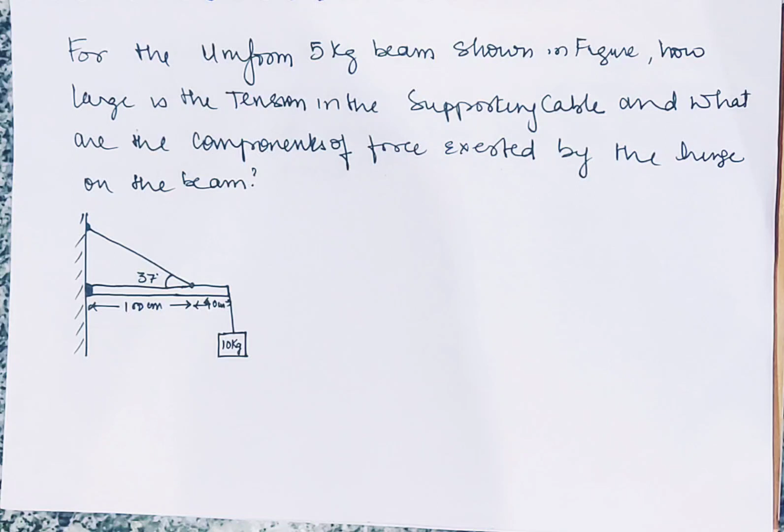For the uniform 5 kg beam shown in figure, how large is the tension in the supporting cable and what are the components of force exerted by the hinge on the beam?

Beam weight is mass is 5 kg. Okay, now let's make the free body diagram of this beam.

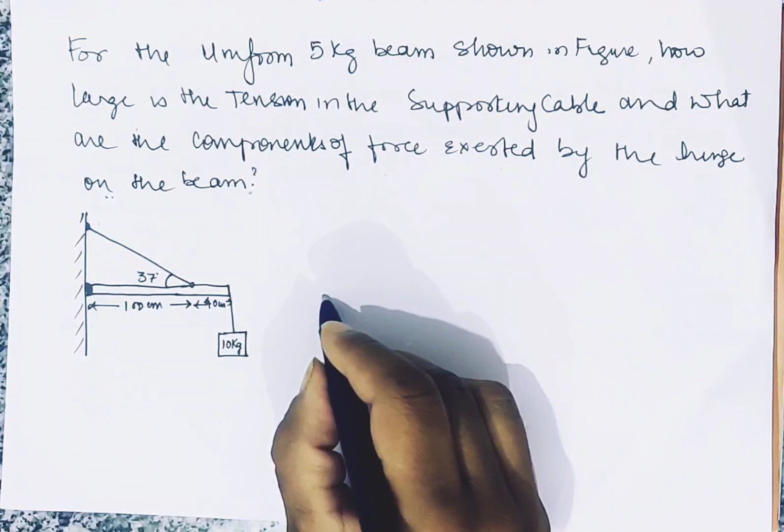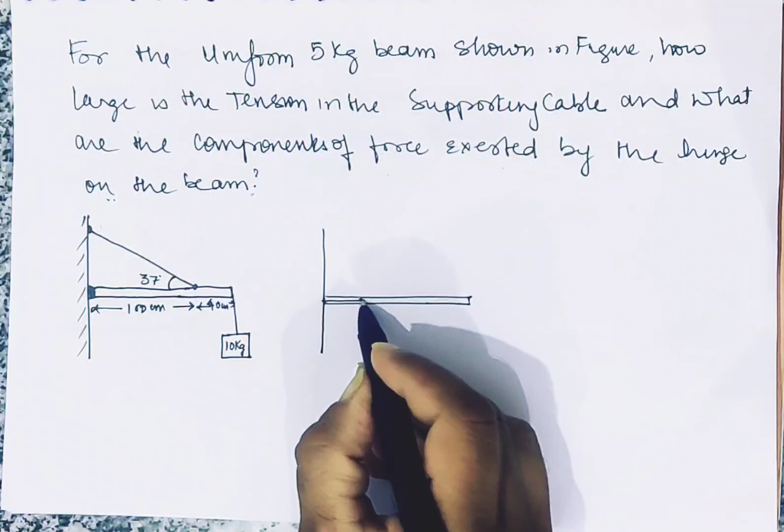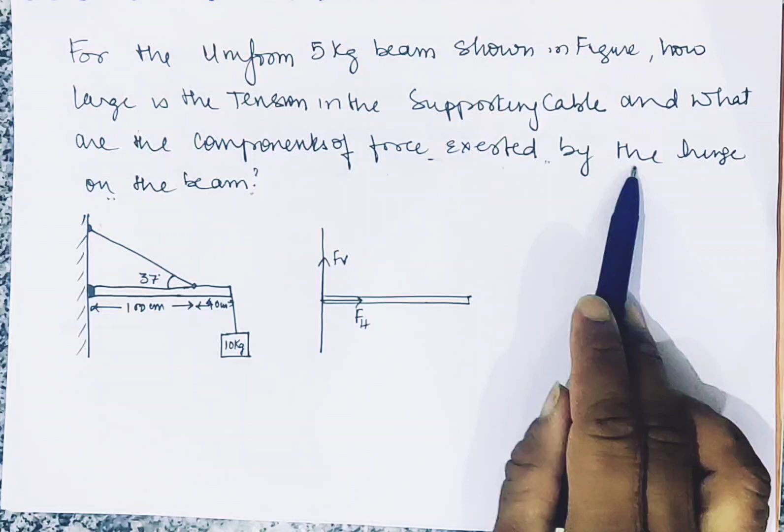So this beam is being exerted by a horizontal force, say Fh, in this direction and a vertical force in this direction, and this is what we have to find out. What are the components of force exerted by the hinge on beam? So I made it like this.

Not necessary that Fh will be like this and Fv will be in upward direction. They can be in opposite direction as well, but that is not important for us to know before solving it, because if we are taking a wrong direction, then we'll get a minus sign in the end.

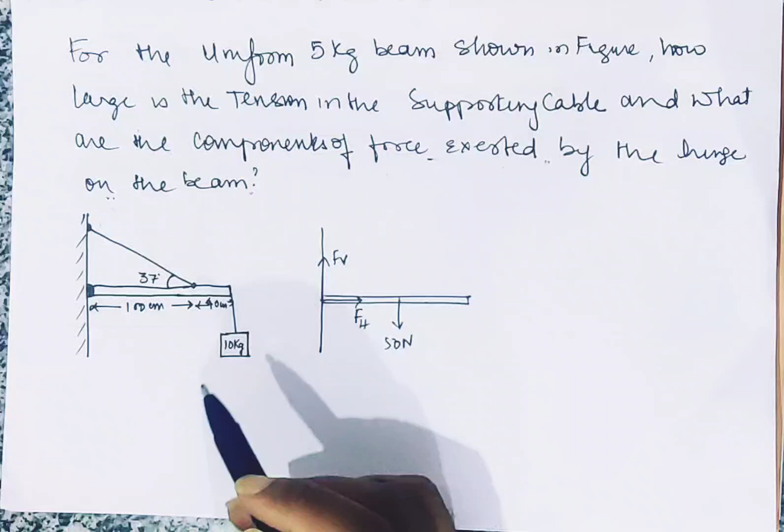Apart from that, we have a 50 Newton weight just at the middle. This beam is 140 centimeter long, so this will be acting at 70 centimeter, 0.7, and then we have a tension at 100 centimeter.

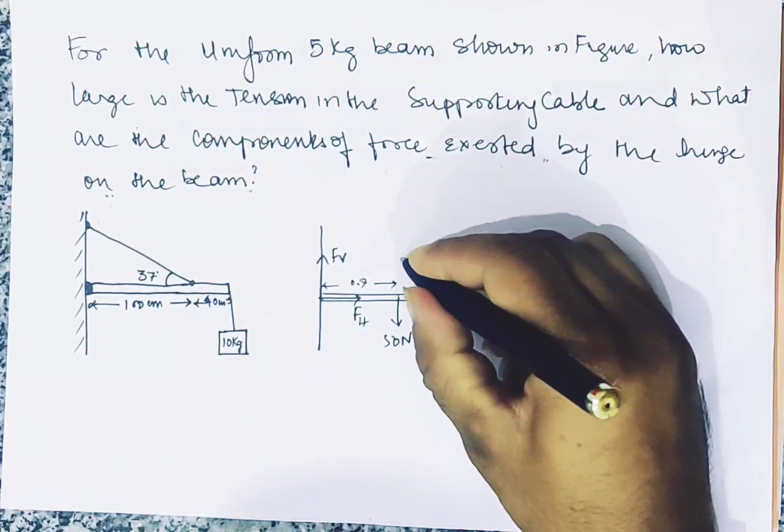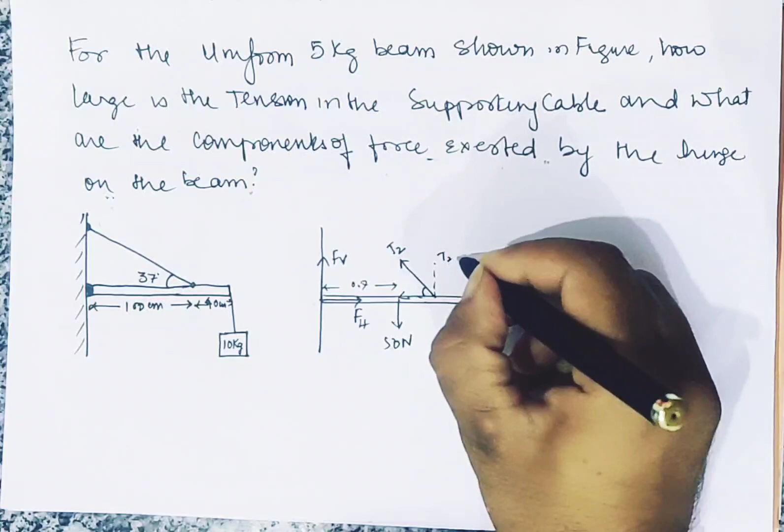This is T. Let me take this tension as T1, this as T2, and we'll have the components in this direction, Tv the vertical component, Th the horizontal component. Now we have made all the components.

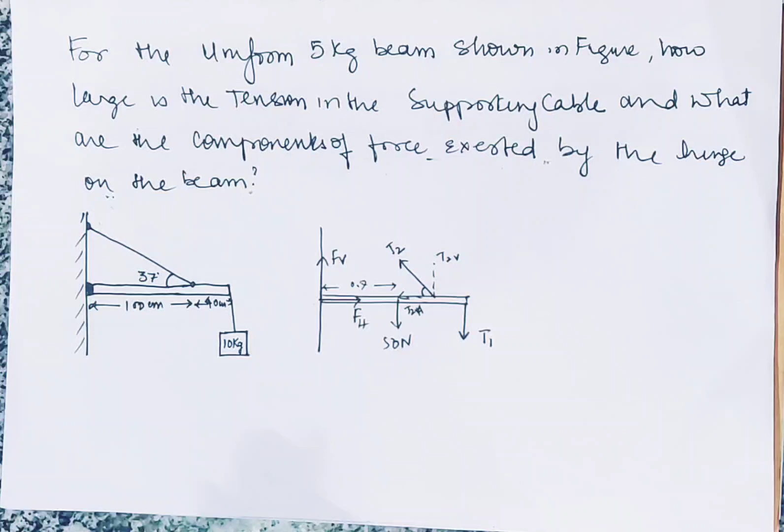The beam is stable in equilibrium in force as well as torque equilibrium. So let's first write the equation for force equilibrium.

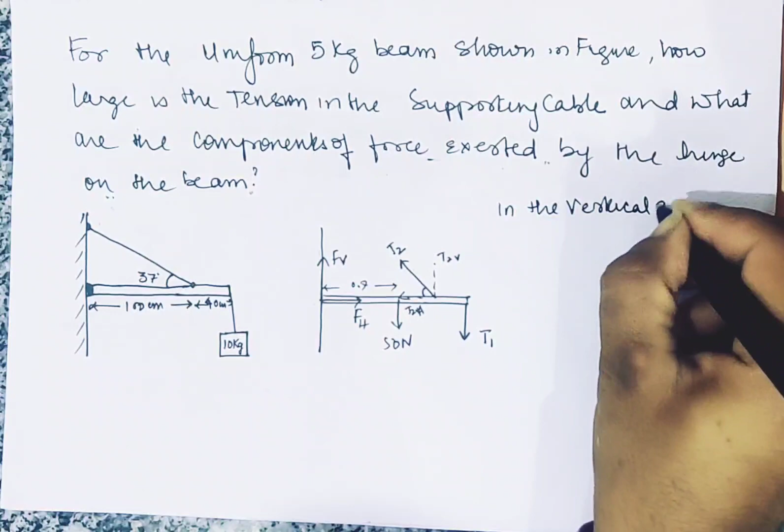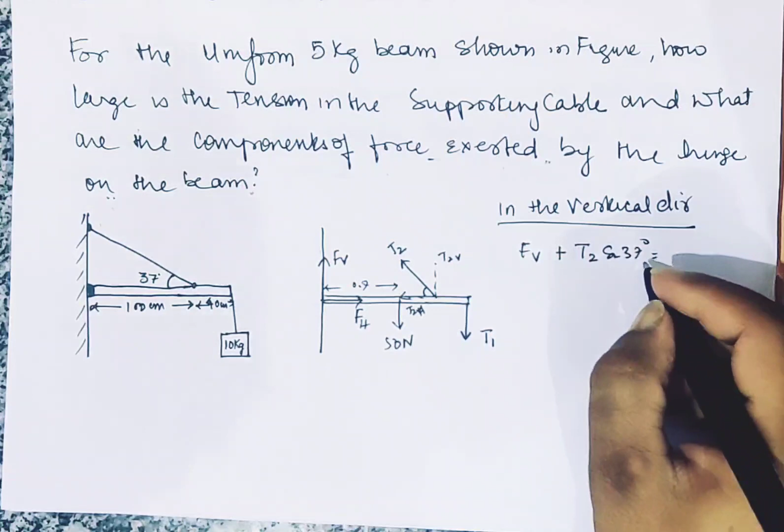So in the vertical direction, we can write Fv, and this is plus T2 sine 37. Vertical should be equal to 50 downwards plus T1, and T1 you can easily write, T1 is equal to 100 Newton.

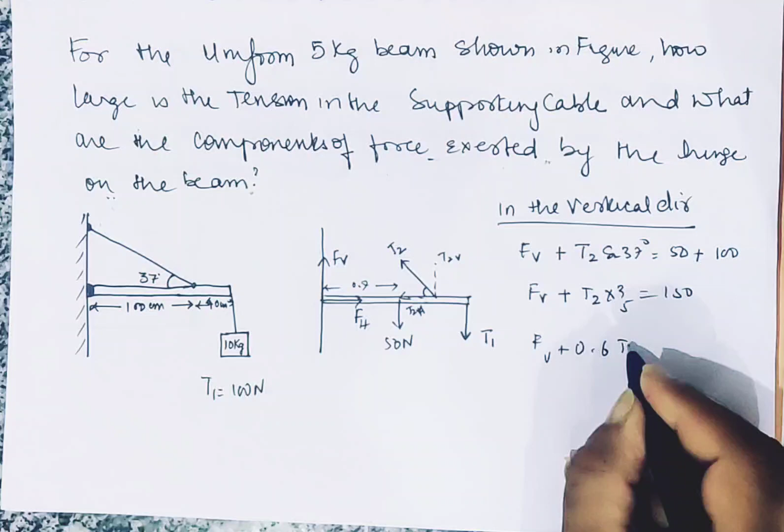100. So we get Fv plus T2 times 3 by 5 is 150, or Fv plus 0.6 T2 is 150. This is my first equation.

Now let's make the equation for horizontal. In horizontal direction, Fh, and that's only one force, which is equal to T2H, that is T2 cos 37.

So Fh we get as 0.8, T2 cos 37 is 4 by 5. Now we cannot still solve the tensions and forces, because there are three unknowns, Fv, Fh and T2, and two equations.

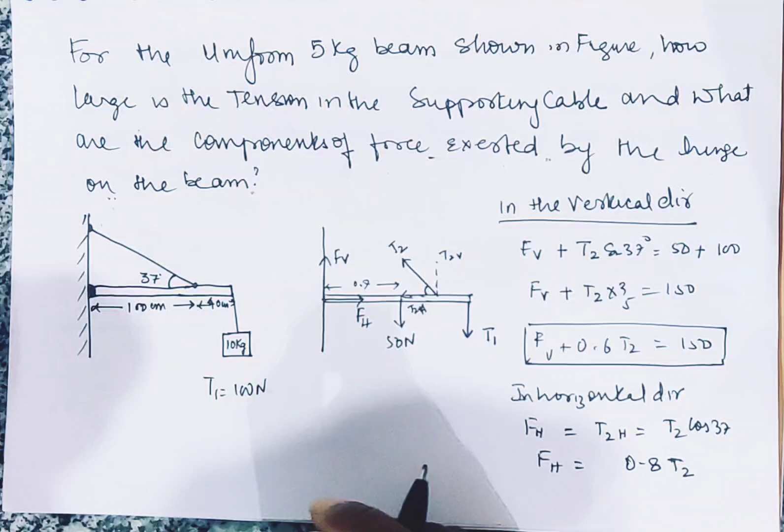So now we will be requiring a torque equation about this hinged point. Torque about the hinged point will be Fv, the line of force is at the hinge point, so into 0. Similarly, Fh is also at the hinge point only, so into 0.

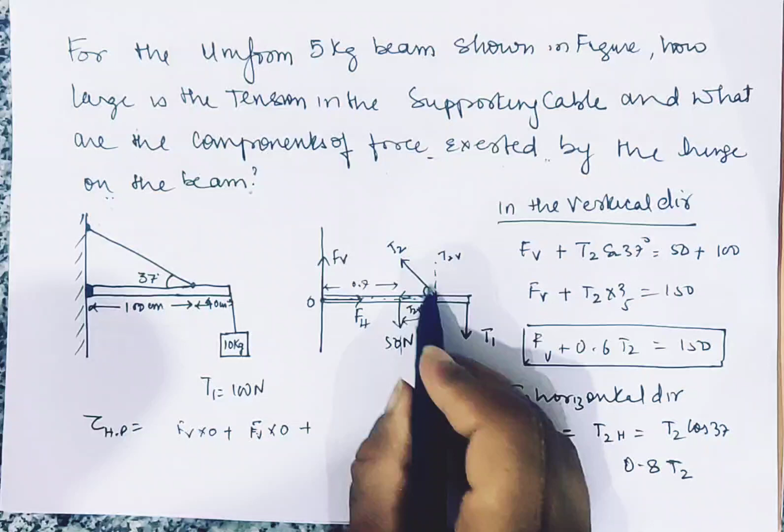Then plus this is downward force, and what we do is we take an r vector and then we rotate r cross f. If it is clockwise, we take a negative sign. Okay, let's take a negative sign.

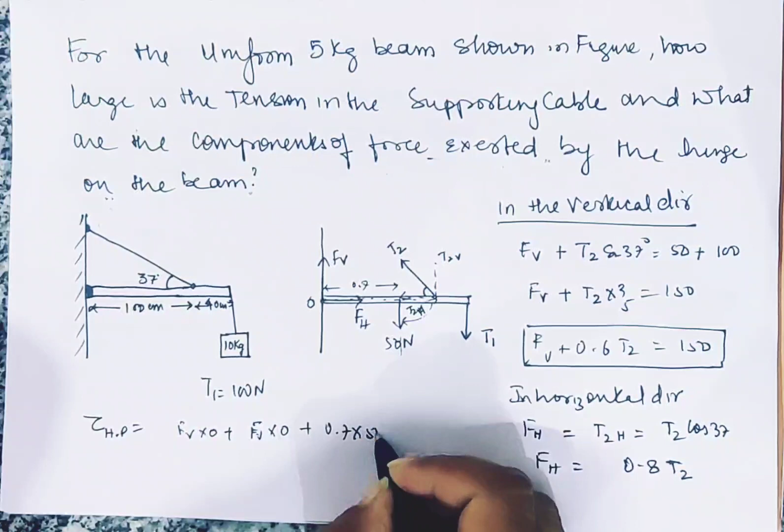R is 70, 0.7 into 50, and we'll take a negative sign. Inside the plane of paper is clockwise, so you can also take minus k cap if you're writing in vector form. And then we have this force T2 vertical, that is

0.6 T2, and see, this R is anti-clockwise sense going to T2V, so we'll take a positive, and this is plus 0.6 T2 into distance is 100, so we'll take 1, and finally is T1, that is again a minus clockwise, so we'll take

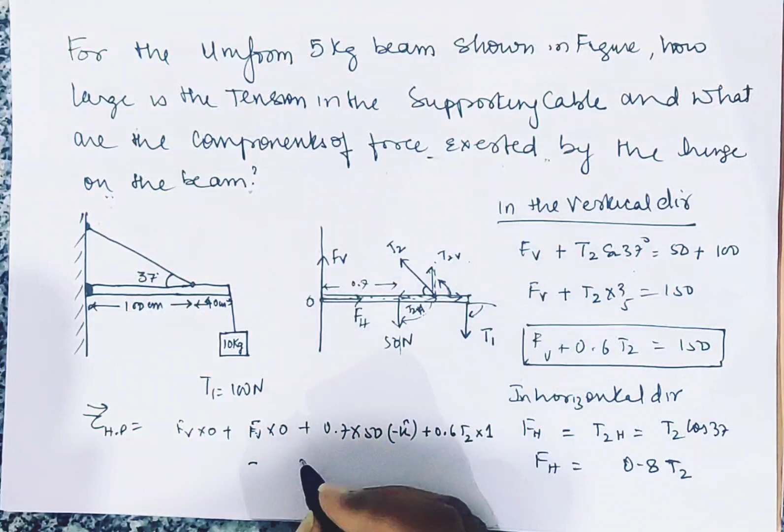1.4 into 100. That entire torque must be 0 because it is not rotating, it is in torque equilibrium. This is 35, all negative I'll take here, I'll keep it here only, 35, and I'll remove the k as well. This was k, I'll remove the k, this was plus k, because we just need the magnitude now.

Newton. So we got T2, and then we can also find out my Fh, which is 0.8 T2, 0.8 into 291.6. So I'll get approximately, just subtract 54 from 291, approximately 235 Newton approximately I'll get as the horizontal force.

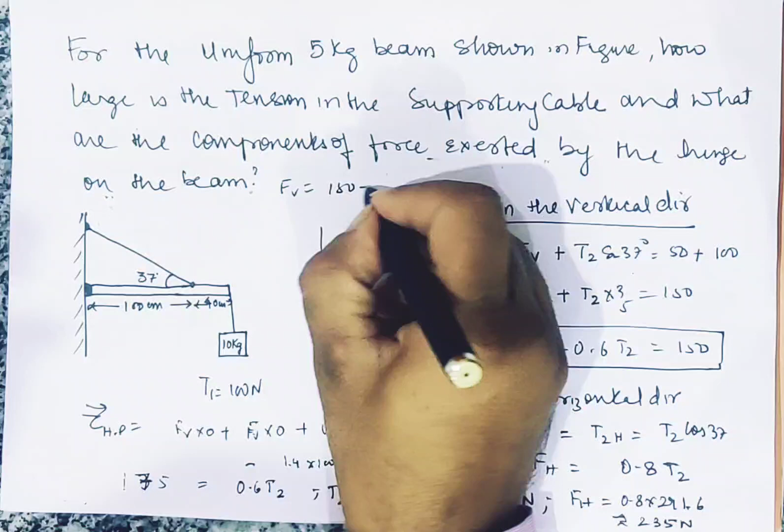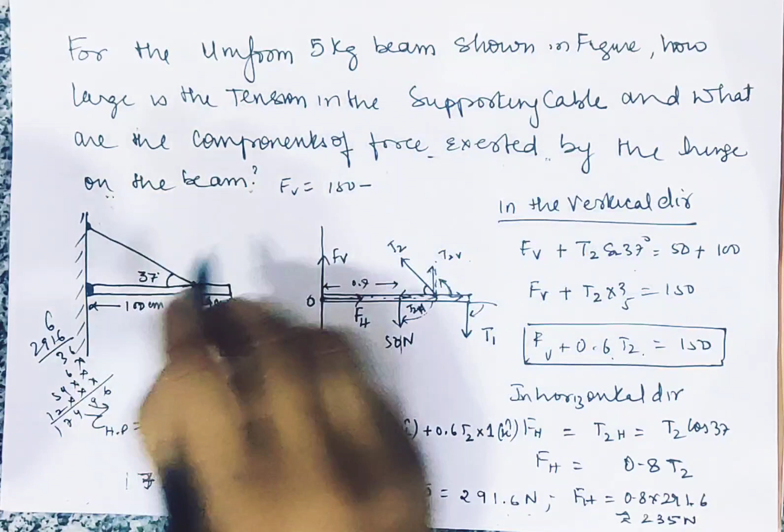And vertical force I'm getting, I'll write here only, Fv is equal to 150 minus 0.6 times 291.6, which will be, you can easily calculate it, 174.96. So we'll be getting 174.96, so I'll get minus 24.96.

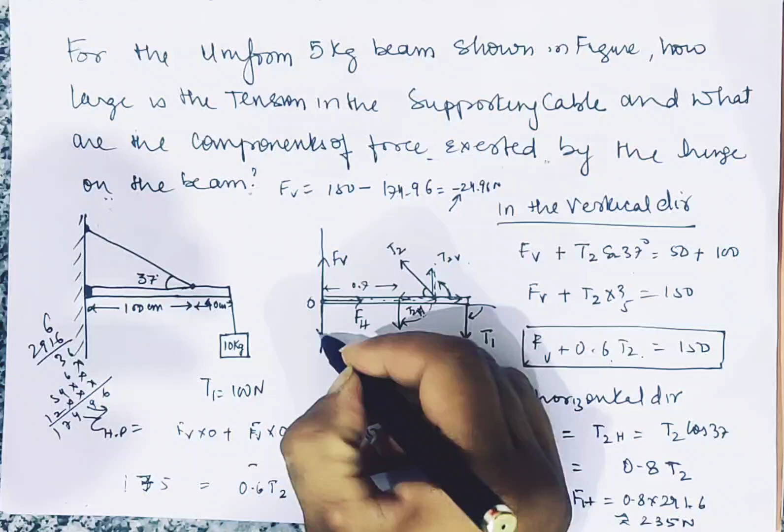The negative sign shows that the vertical force is actually downwards. Okay, this is 24.96 Newton, and this Fh is coming out to be 235 Newton.

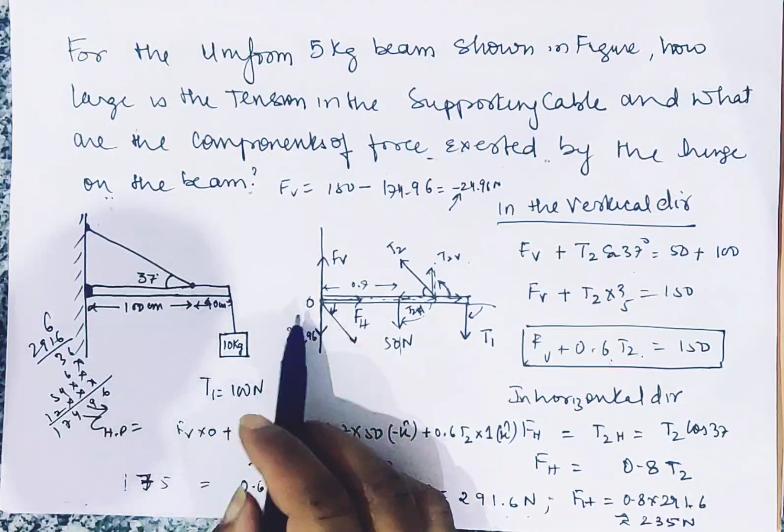So the entire force can also be written like it is acting in this direction, and we can easily find out the angle with the horizontal at which the hinge point is applying force. So we have got the answers. We have got T2, Fh and Fv.